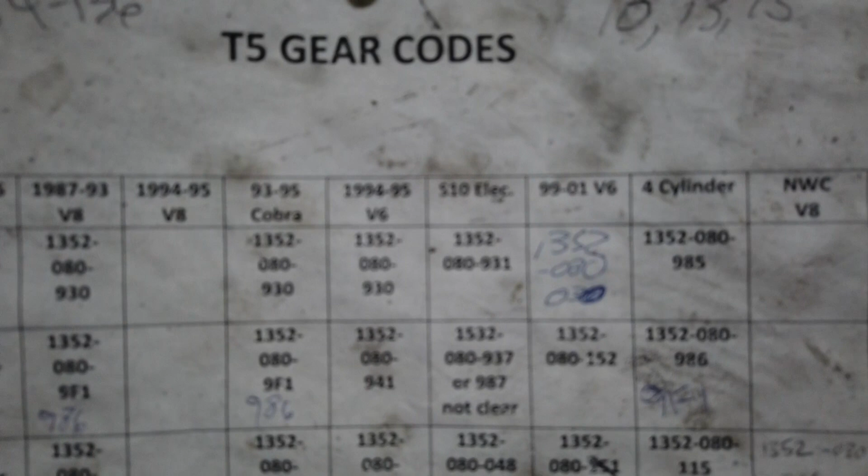This is actually something I want to share with you guys. So I have this chart here of the T5 gear codes. The way that it goes is you have the 87 and 93 and all that good stuff. I can't get the camera to focus right now, but if you want a copy of this, let me know, I can send that to you.

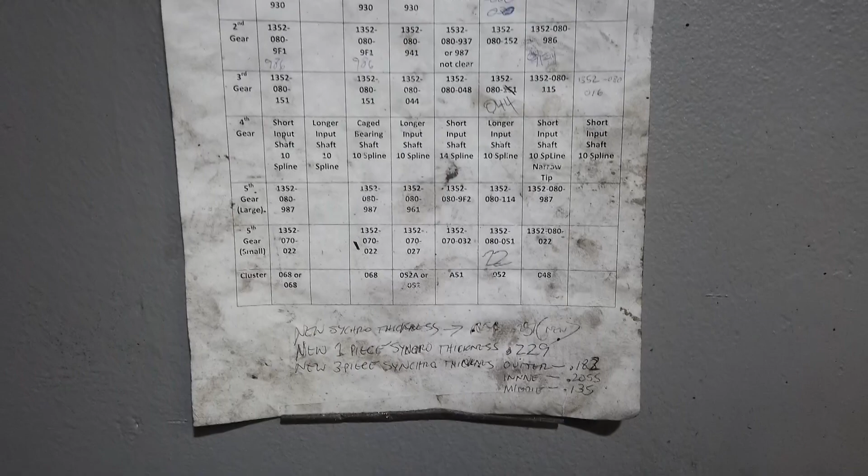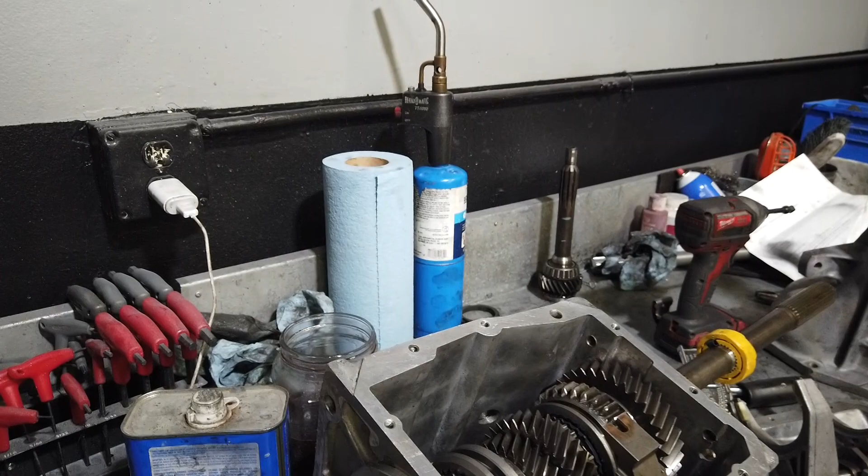And this is - I don't know if you can see it or not, but this is an 068 main shaft, if you can see. So the V8s come with a 068, and the V6s will come with a 052, and the 4-cylinders will come with a 048. Now some V6s with the 052 you could actually use in the V8s, and the strength of it is still the same.

This is just something that I discovered over the years. So if you ever see a V6 from 99 to 01 T5, grab it, because the gears in that T5 are just as strong as the V8, if not stronger. That was like the final days of the T5, and they improved a whole lot of stuff.

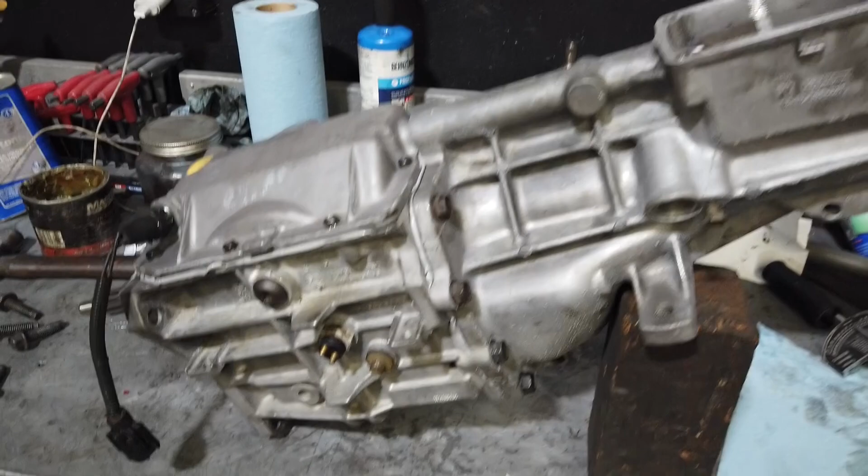Alright, so we're at the stage here, we got the T5 drying. This is a little tip I forgot to mention in my videos when I did the rebuilds - the reason I have it arced like this is when I put a little trans fluid on the bearings to lube them up so they don't start up dry, there's a little small puddle of trans fluid in the bottom. So if you lay it flat too early, the fluid comes and starts to eat away at the silicone before it gets to dry, and it'll never seal again. So to avoid leaks, take your time, leave it upright, and then do the front retainer shim later, or you could just do it like this.

So it's been about 2 days since I've been able to post, but it's because I've been 2 days busy. Anyway, yeah, we're back in the house, man. Airport, airplanes, and all. No ice cream trucks this time, but we're back in it.

So today we're gonna put in the transmission and start fooling with the wiring. Check this out.

So boom, there it is, the golden T5. Okay, going in, about the prettiest thing going in this car. I figured since I already had one cleaned up at the shop - this is a used unit, this is what a lot of times my used units look like. You know, I inspect the synchros and all that good stuff, and boom, here we are with this.

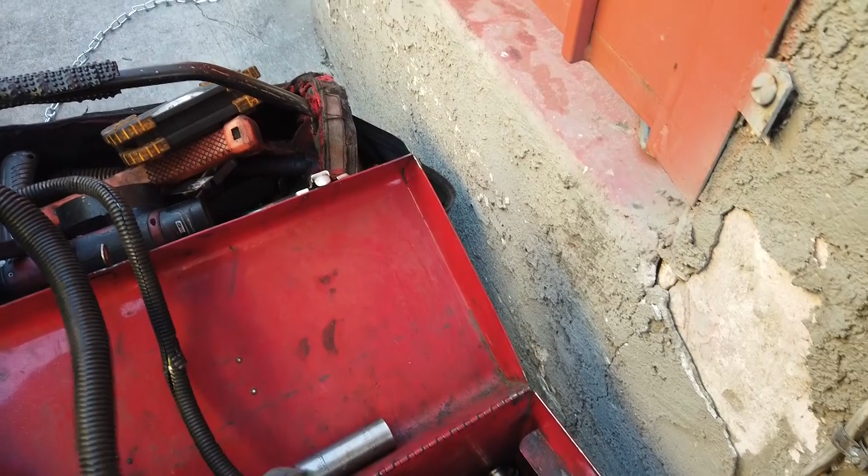Alright, okay, let's go. Finally got the 4-cylinder wiring harness out. I kind of wrecked it a little bit with the screwdriver trying to squeeze it out, but it's out. Now, one thing I had to cut off of this 4-cylinder harness was the distributor plug, because the V8 harness that I have does not have it - where is it? See, it was cut off. I don't know what happened. Maybe somebody else did what I just did in the junkyard.

So cut it off. The wires match, the wire colors match. I'm gonna check the wire schematic and make sure that they do the same things on both cars. It's got this insulation on here, so when I fuse them together, I'm going to go ahead and use this insulation wrap again because it's there for a reason. And yeah, so boom, that's my V8 wiring harness.

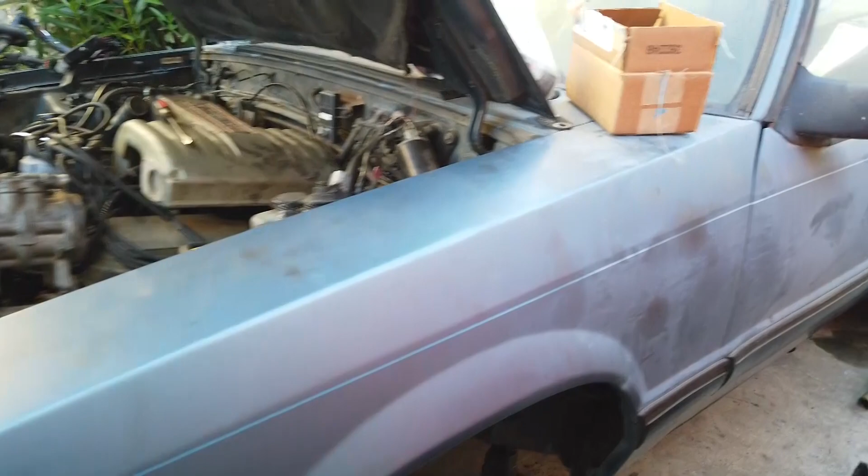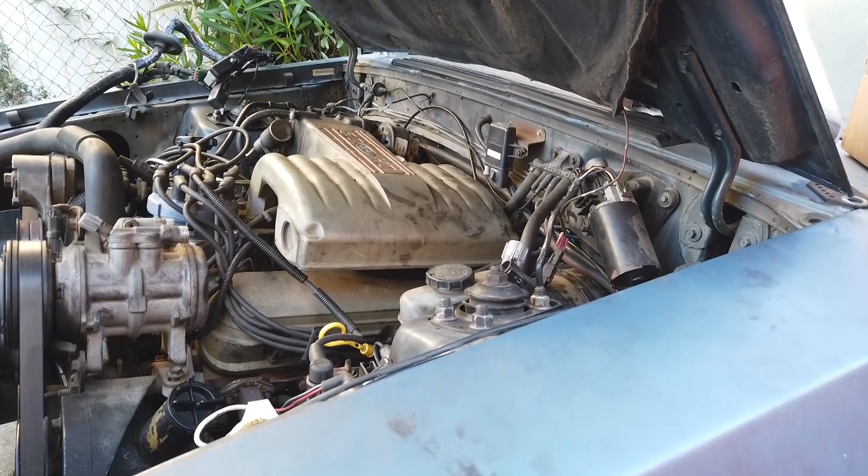That's going in today. But two things I forgot. Number one, I need washers for the bolts in the bell housing. And two, I need a transmount. I don't have a transmount here with me, so I'm gonna go ahead and go grab that and come right back.

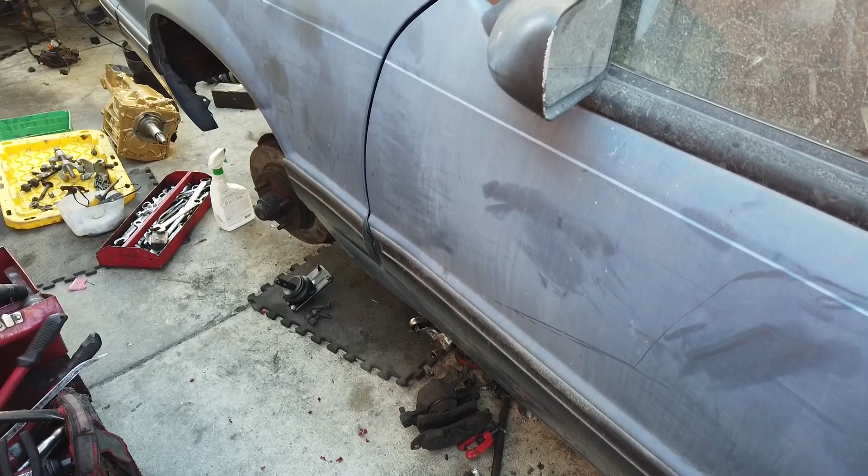So once again, we have reached a frustrating point. This is what I'm talking about when I say it takes a while to put together cars if you don't have all the components. I used to have an engine block plate, T5 block plate, sitting in my shop for about 2 years. I gave it to my homeboy for his car because I didn't think I'd be doing this swap for quite some time. And I got the bright idea to just use the automatic block plate.

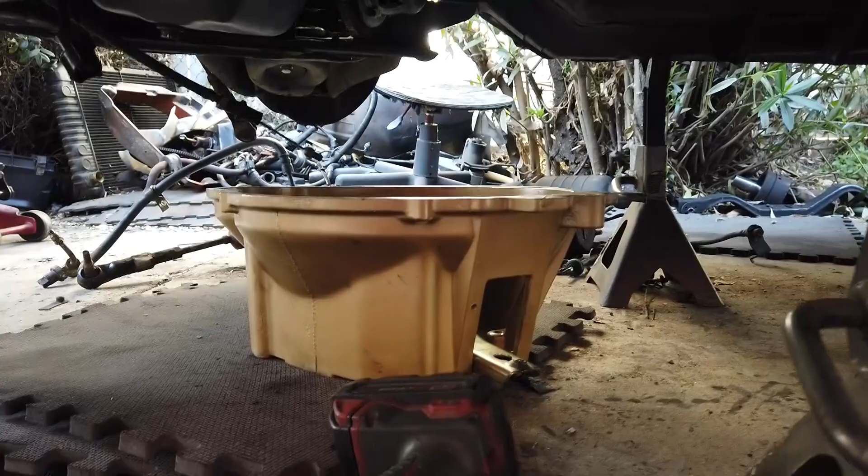Problem is that the starter locations don't line up with the bell housing. So that just means I gotta take the pressure plate back off and take the flywheel back off. Not a big deal, it'll take me a few minutes. I've already changed the rear main seal. That's just something good to do every time you do a clutch job, in my opinion. But yeah, super frustrating.

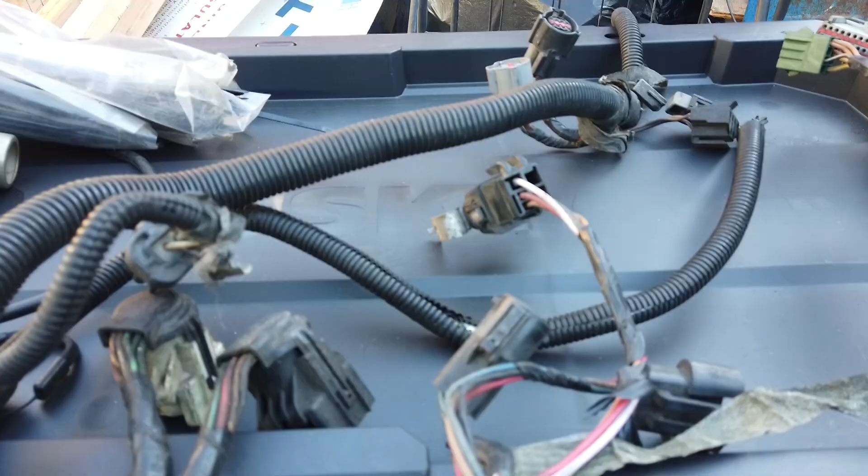So instead of dwelling on that being frustrating, let's just tinker with this wire and see if we can get it to do what we want it to do. Since we can't install the trans because of the block plate, we're gonna go ahead and move on to this wire. And this is low-key what I've been trying to avoid since I started this project.

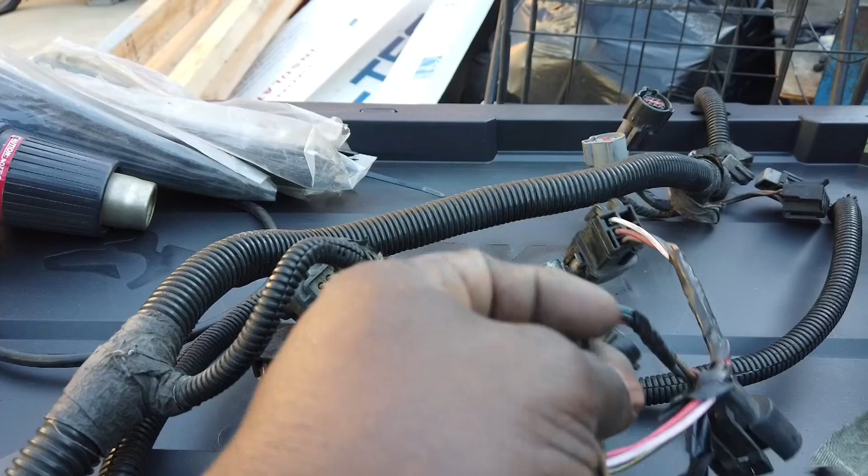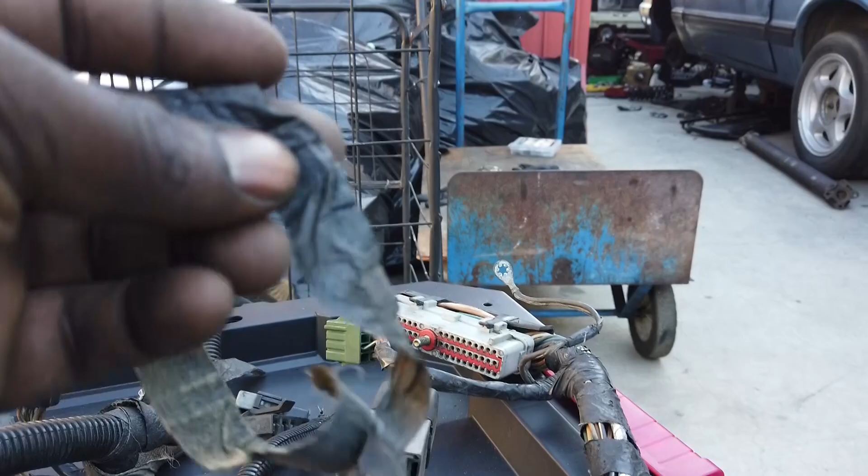Yeah, so there's a few things I'm gonna do. Number one is rewrap some of this electrical tape. This stuff has been on for 30 plus years, I could use a rewrap. I'm probably gonna go through a whole roll of electrical tape, but that's fine.

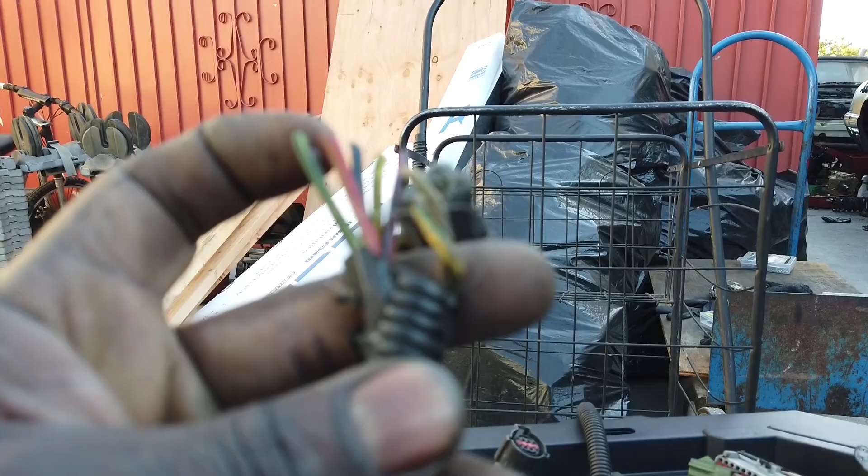Like I said earlier in another video, the only part of this wiring harness that is missing is the connection here for the distributor. And all I did was cut the one off of the 4-cylinder harness, which is this one right here. Other than that, I think that's it.

Also, I need to do some splicing too with the alternator wires, because alternator wires in this car are short since the alternator is not in the same location. So I gotta extend the wires for the alternator as well. That should be interesting, a little tidbit to put together.

So I downloaded this wiring schematic. Very basic. I actually like the way this one is done versus the one with all the lines and everything. This gives you the names of everything. So I'm just gonna go through it so we can understand what's what.

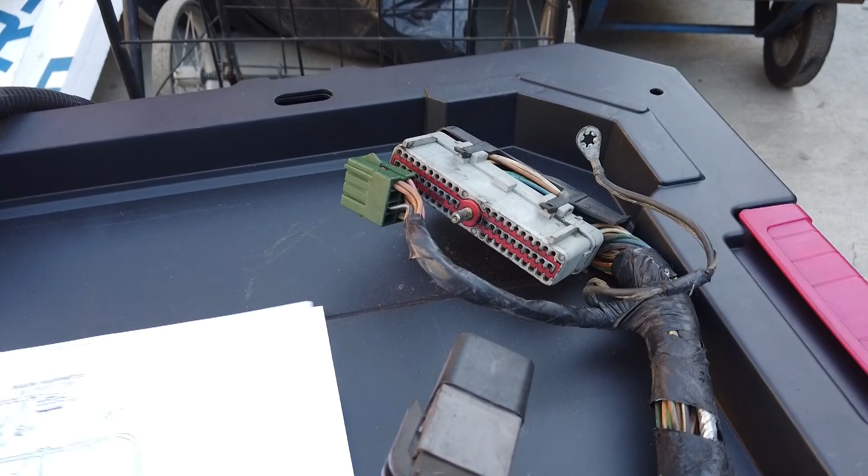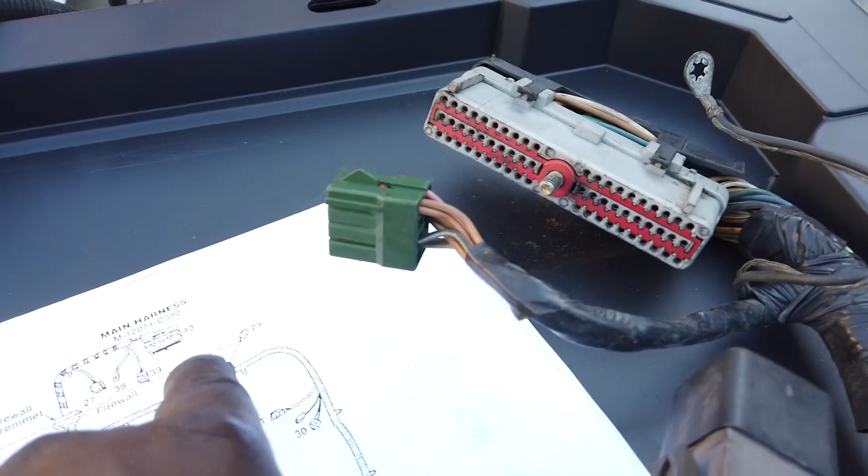So for me, this is pretty obvious. I know this is for the computer, and it's on this, it's number 42, 60 pin connector. So boom. Right when we come out of that, we got two, 38 and 39. See these two connections right here. So 38 is the body ground and 39 is the green 8-pin connector. So here's the green 8-pin connector and here's the body ground. All right, so we're moving up the snake here.

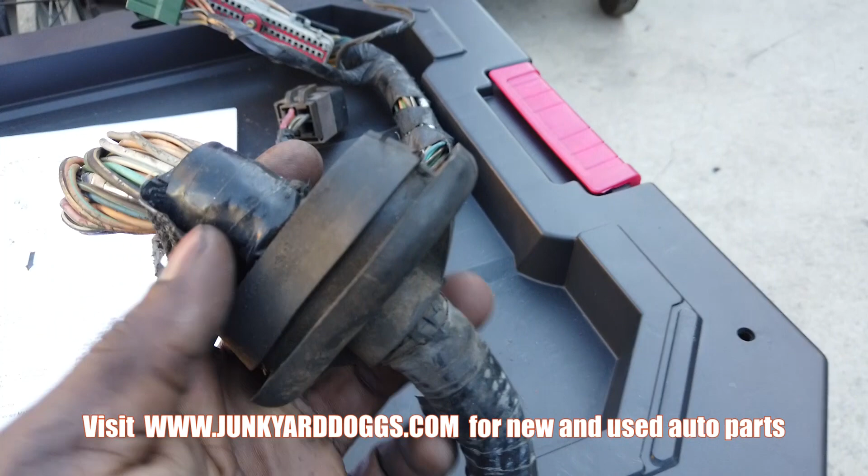When we get to this, what's that? So we move up the snake here to that. That's 27, that is an EEC power relay. Anyway, we'll move up the snake. Here's a rubber grommet that goes in the firewall. I'm gonna rewrap all this.

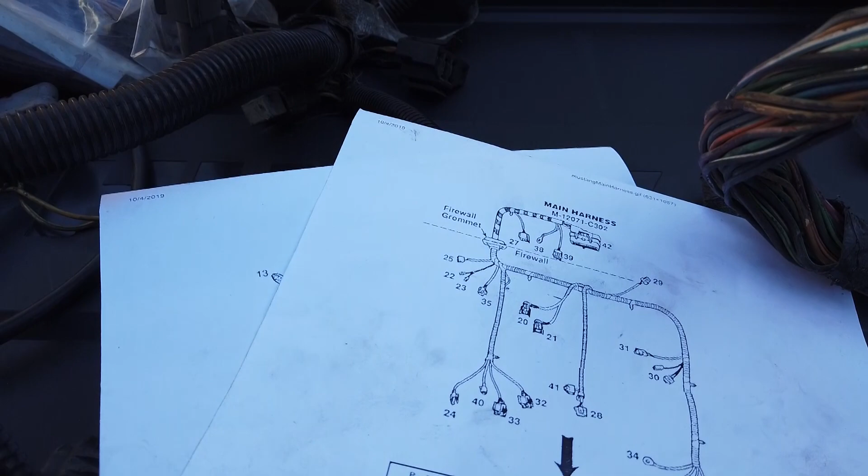Let's keep going. And we come to this group right here, all right? So as we follow that on this, we've got this group here. So you got one that has two, it's coming out, and then you got this one, and you got that one. So this one is 25, and that's the EGR vacuum solenoid.

And then this one, which has a broken wire, so I want to rewrap that a little bit. Anyway, that one is, this is 35. This is an AC pressure switch. Interesting, okay, I don't have AC in it yet.

And these two are 23, 24... Thermactor diverter solenoid and mass airflow. No, hold on, 23, 22. Thermactor air bypass solenoid and air diverter solenoid. So these go to something else in that corner there. Okay, let's keep going up the snake here.

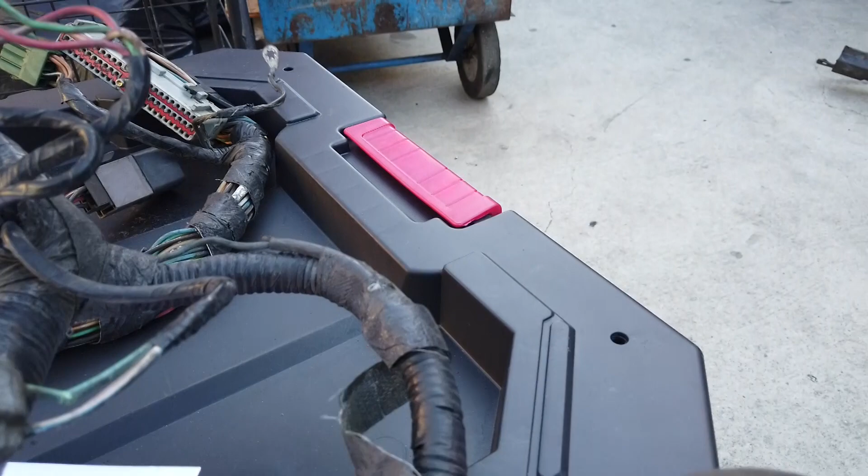And then we got, as we go down the snake here, we got this long branch off right here, right? Which I would imagine would be this right here. And it goes to this group. So we got like a relay, we got this 8-pin connector here, and then I know this is for mass air, I've seen this before.

24, mass airflow meter. So that would be this one, like I said. And then it's got a round one. That's 40.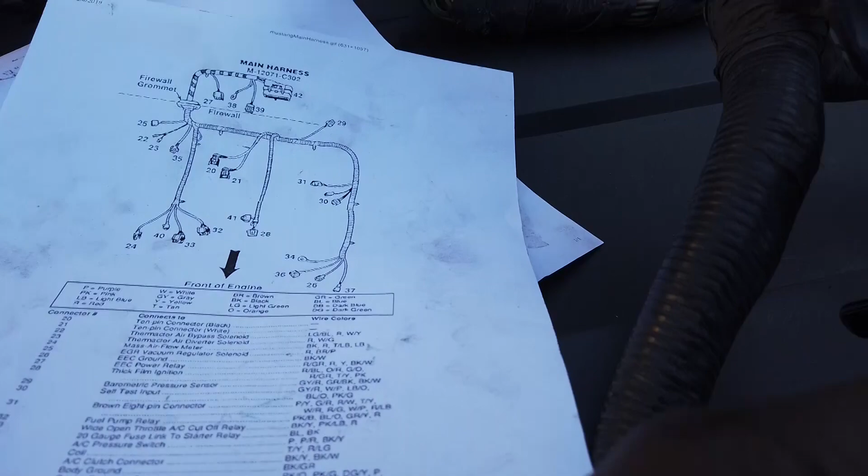HEGO sensor connector, main harness. So I'm thinking this is for O2 sensors, maybe. They go underneath the car.

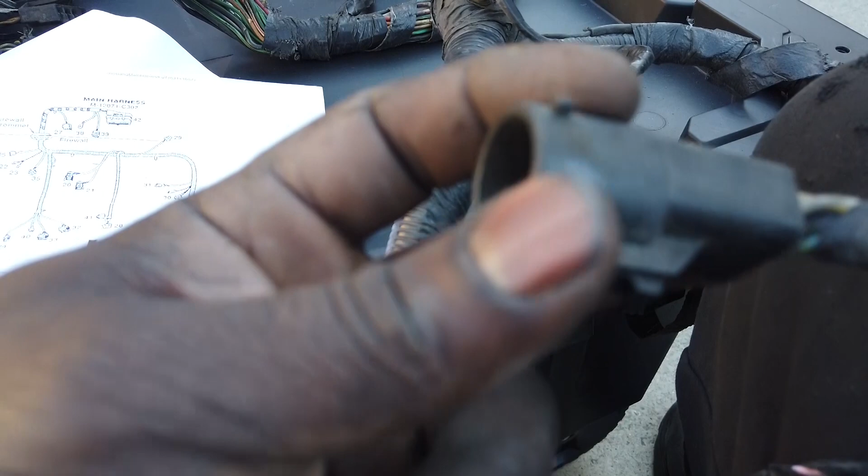And then there's this big chunky one, 33, cutoff relay, wide open throttle cutoff relay, or it could be 32, which is a fuel pump relay. I'm thinking it's a fuel pump relay.

Let me see, pink and brown. Oh no, pink and blue, black, gray and yellow and red, green, yellow, red. Oh wow, that's crazy, this is not matching at all. So I'm talking about that might have been yellow back in the day. I don't know, it looks like it could have been yellow. It looks orange now, it's hard to tell.

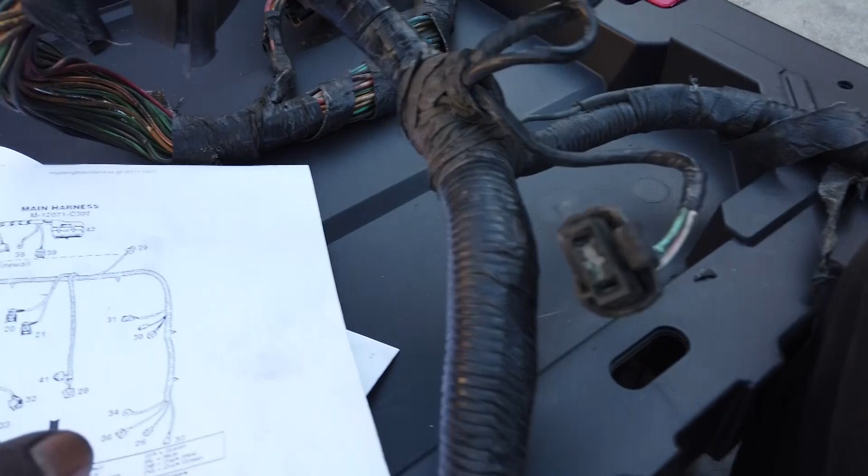That's what I mean, why this stuff kind of irritates me a little bit. Anyway, let's keep going down the line here. We got these two, so let's go down to...

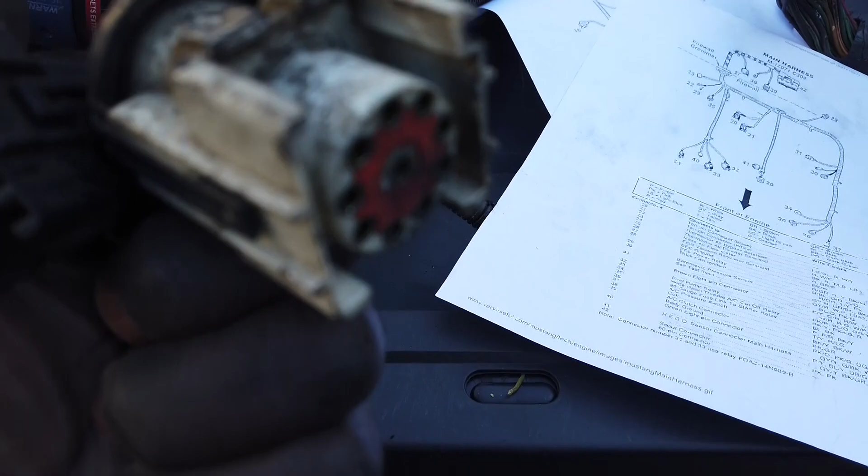Snake 2, and I've heard this joke told before, the salt and pepper shakers. These are dirty, jeez. If anybody has any suggestions on how to clean this without using water, let me know.

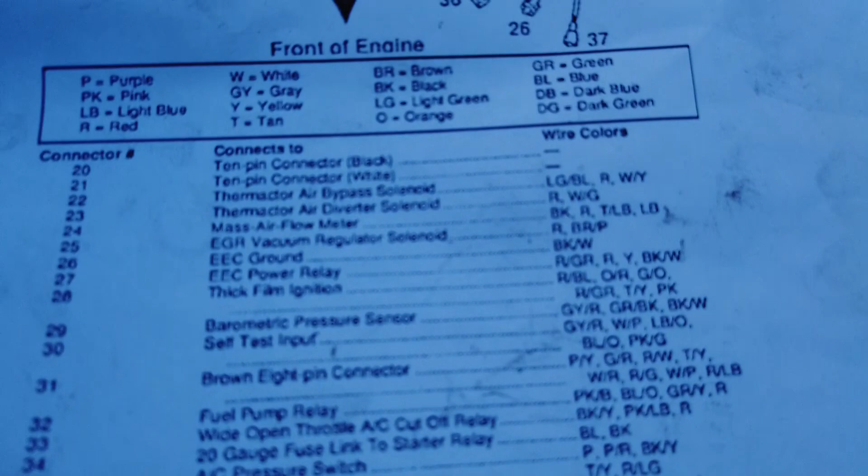Alright, so that would be 20, 21, 10-pin connector, white and black. Alright.

Moving on down the line, we got this long guy right here, which leads to what I know is a distributor, and it's not there. The distributor cable's out there, 28, thick film ignition, so yeah, it's not there. So we're gonna have to peel this apart and do some butt connectors and heat shrink.

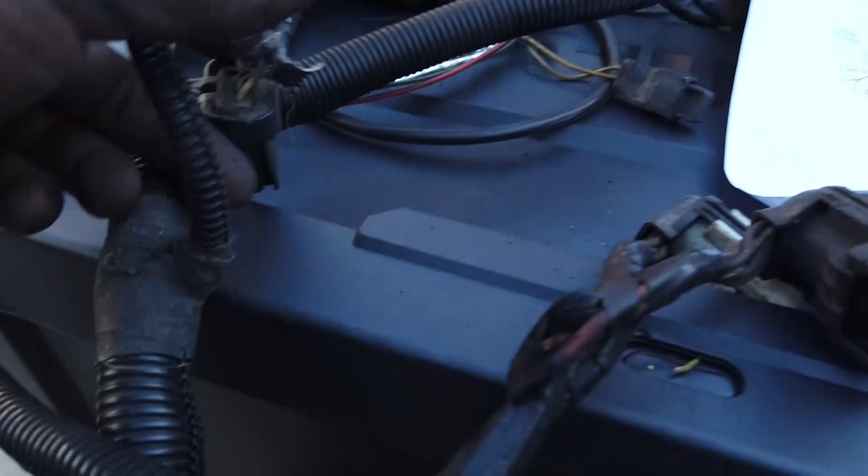Let's keep going up the line here, and we get to this. This is that guy right there. That's 29, barometric pressure sensor. Oh yeah, that's the one that's on the firewall. So I guess it plugs in under there.

And they keep going up the snake here. Let's keep going up. And then we meet this little group of guys here. So I guess this would be considered 31 and 30. Interesting, I know this is a self-test thing. This is not connected to anything.

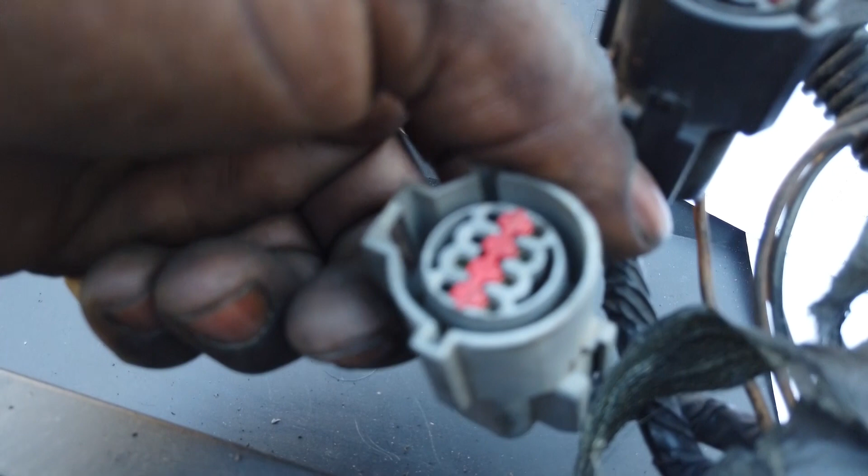But these 31, a brown 8-pin connector. See, I guess it's not the right vehicle, right year or something, this harness, but it gives me a general idea. There's supposed to be, this is an 8-pin connector and this is an 8-pin connector. This harness is from an 89, so I'm assuming that it's a little different depending on the year.

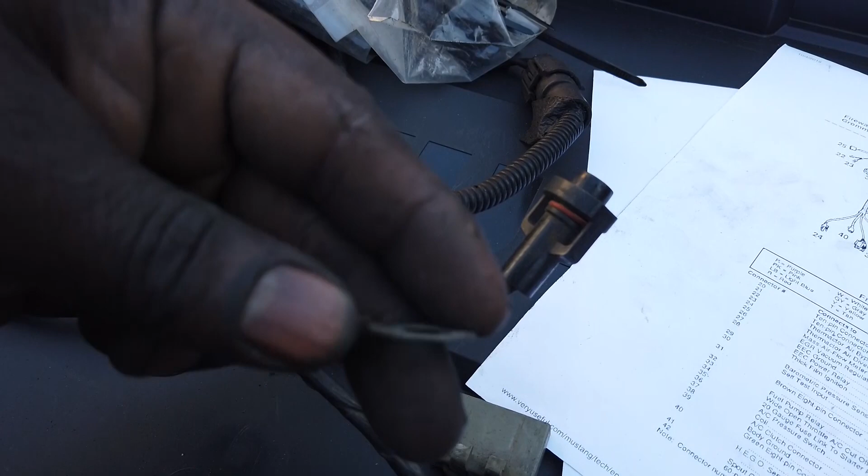So let's keep going. And then right here we have 4 connections, so this loop's 34, I'm assuming. It's 20 gauge fuse link to starter relay. Boom. And then I know this is a ground of some sort, so 26 EEC ground, you plug that in.

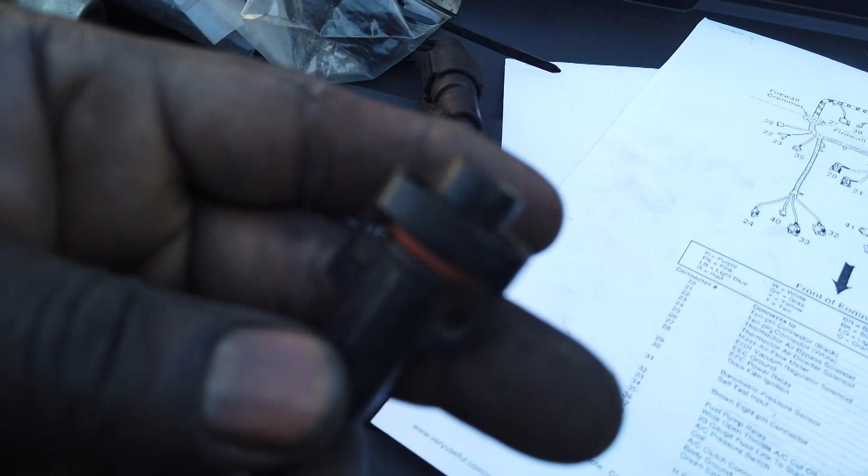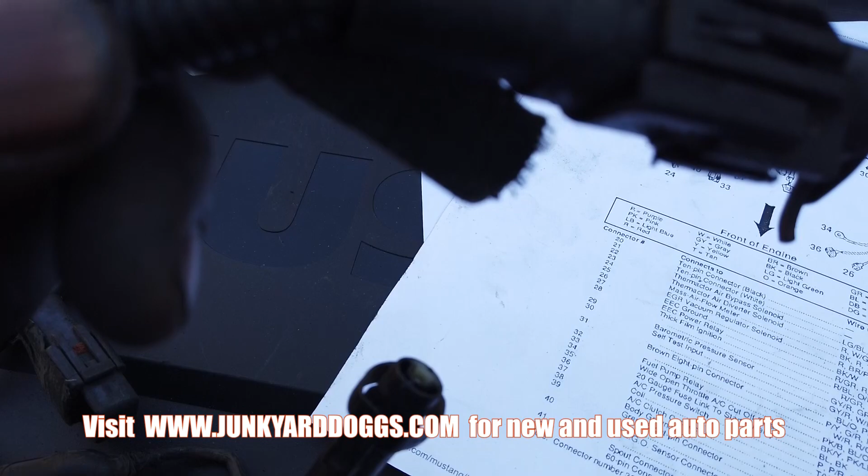This, I believe, goes to the coil. Let me see, 36, yep, it's coil. Now we got this boy right here, it's been plugged out, it's 37. AC clutch connector.

Okay, so that's it, that's everything that I could figure out to the best of my ability. So I'm gonna go ahead and start cleaning this up.

Let's go. Yo, check this out, I'm doing wiring, yo. I'm gonna take this thing, I got the heat shrink and everything. I watched a couple YouTube videos about it, but I'm actually doing wiring. Like, I'm actually doing this, man. This is tight, I never really did this before, so hopefully this goes well.

I'm just matching the colors right now. So yeah, let's come back in a minute when I get it done.

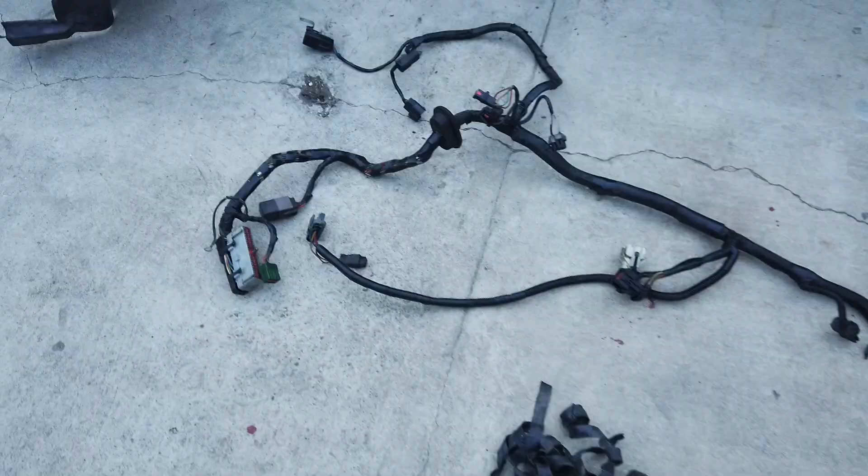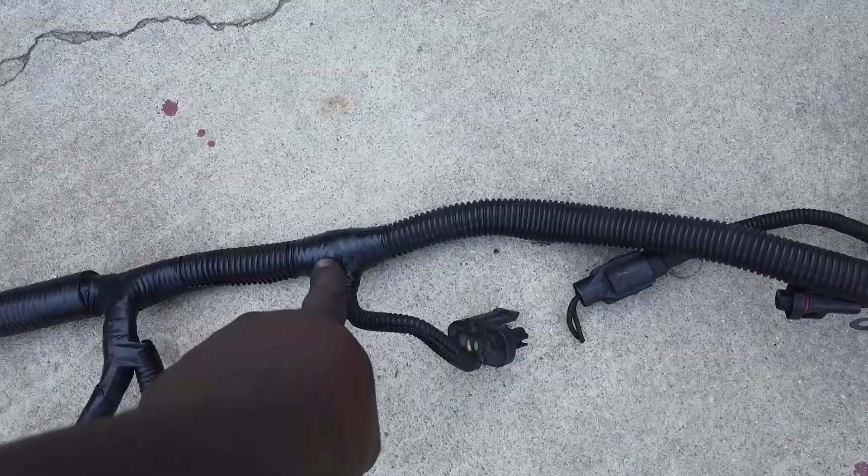So there's the harness cleaned up. So I rewrapped this area right here, I rewrapped this connection right here, rewrapped down there. I didn't do that part because I ran out of tape, but I rewrapped here. I did this, fused this in. I rewrapped there, I rewrapped here, and I rewrapped there. And that's the pile of old 30-year-old tape. Can't be that bad, it lasted this long, right?

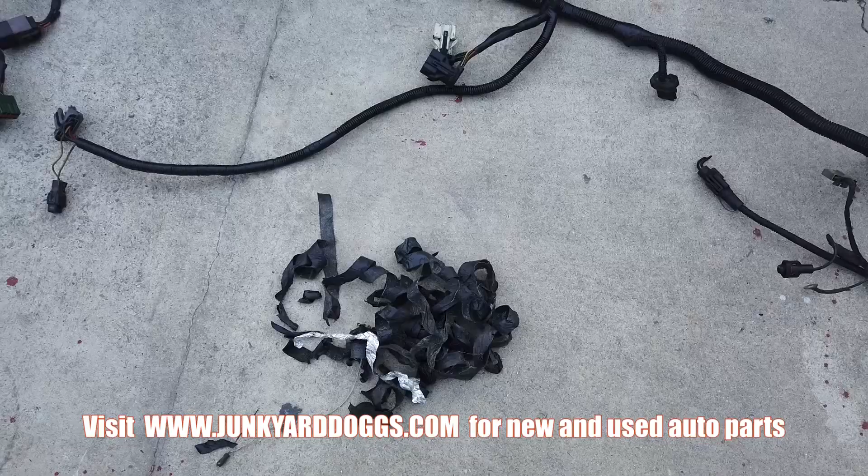All right, so let's go ahead and try to line this in now. All right, let's pick this thing up. Alrighty.

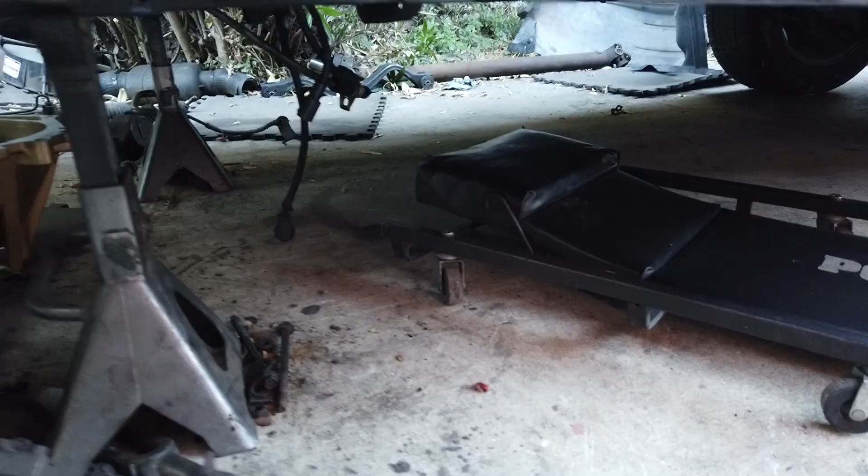Well, one guy said to put a little grease on the 60-pin connector so that it would make it a little bit slicker. But the problem with that is when I go to grab it, it's going to be hard to grab. So I'm going to try it my way first, and if it doesn't work, I'll try his way.

All right, let's see here. So I kind of made the mistake of putting the stuff in first. So what I'm going to do, I shouldn't have put this in until I finished doing that. I was just kind of having a day where I wasn't getting much done. So I'm going to take these, at least take this part out of the way.

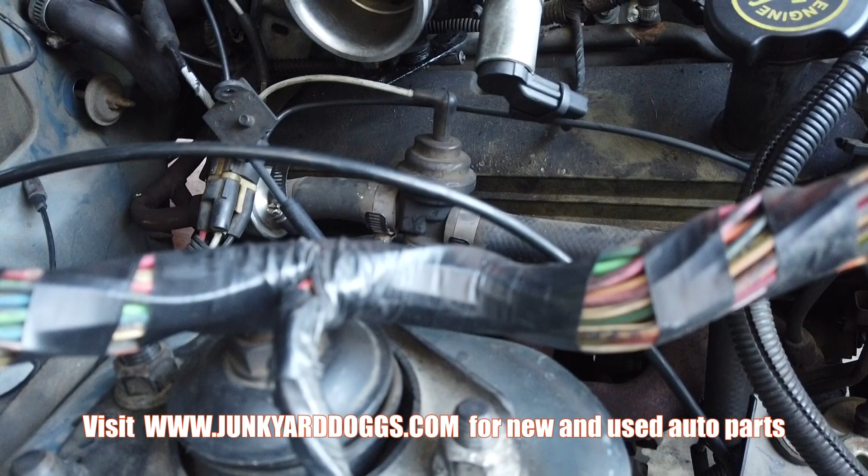I'm going to go look at my other Mustang to see if it comes over the line. I think it goes under like that, but we'll see.

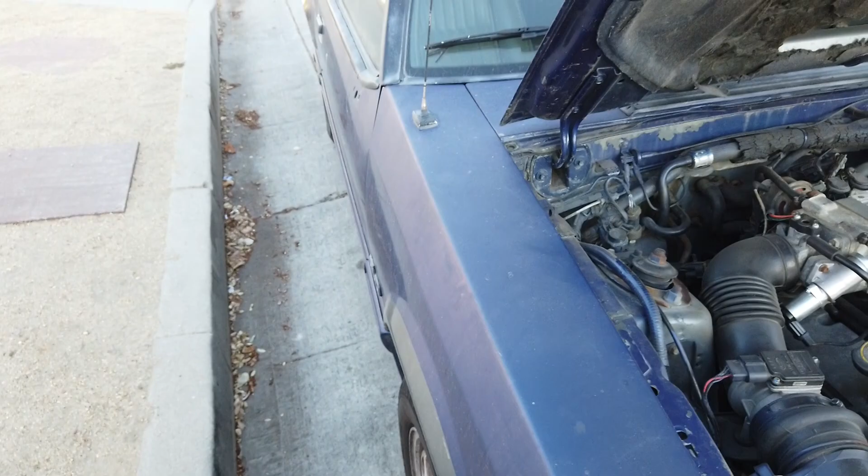All right, let's go. All right, so this is my vert, it's the beater, the F-it bucket, you know what I'm saying? So check it out, it goes underneath the line here. Yeah, so it goes underneath the line, runs across the firewall there, behind the sensor. I'm gonna leave this up while I do this. All right, let's go back over here.

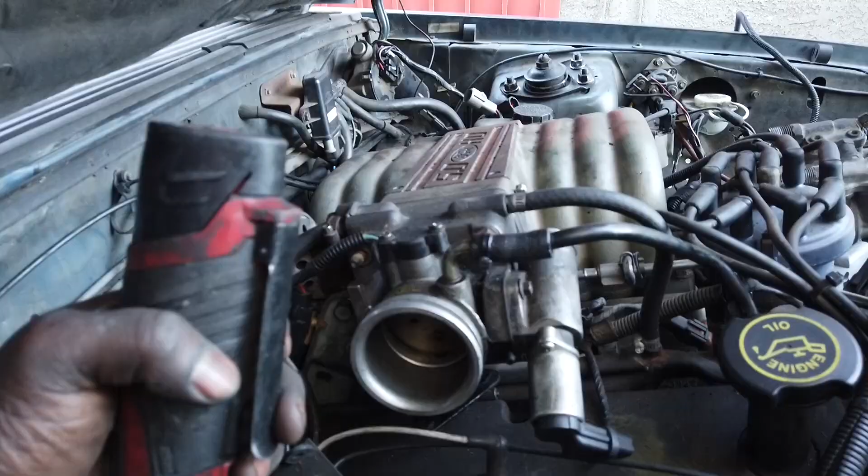So I'm gonna go ahead and remove that. I'll find it in a sec. There it is. Pull that out of the way. Oh, that's weird. Alright, so we're going to put him in there.

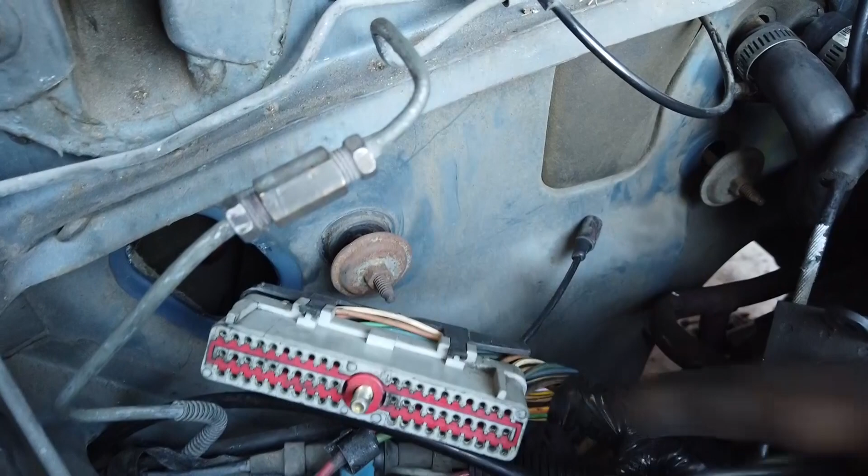Needless to say, I don't have somebody filming this, so I want to stop the camera and start to shove it down and pull it down myself. But I got to get inside the car and do a little bit of this so that I can start to make it back down in there.

So we got pulled through the firewall, and what I did to make that easier, which I didn't even think about until I didn't have any space, was to just take off the protective cap. Made it so much easier to go around corners, and I'll just put it back on right now.

You know? So boom, it's in there like somewhere, you know what I mean? You know what I mean? Alright, you know what I mean?

For sure. Alright, so from what I believe, the computer goes back up in this little spot. We screw it down. I lost one of the screws, so I'm gonna go ahead and take it off the other one. So one's a ground, one's to hold this down, and then you gotta screw this into the computer.

Boom, boom. Let me hear you say, well. Yeah, that's about it, man. Get that mug up in there, and we're good to go.

And this green goes to this, like that. This green plug goes to that. You know, now that I'm doing this, I can see how this was a lot easier than I had it in my mind to do. It's even going that way.

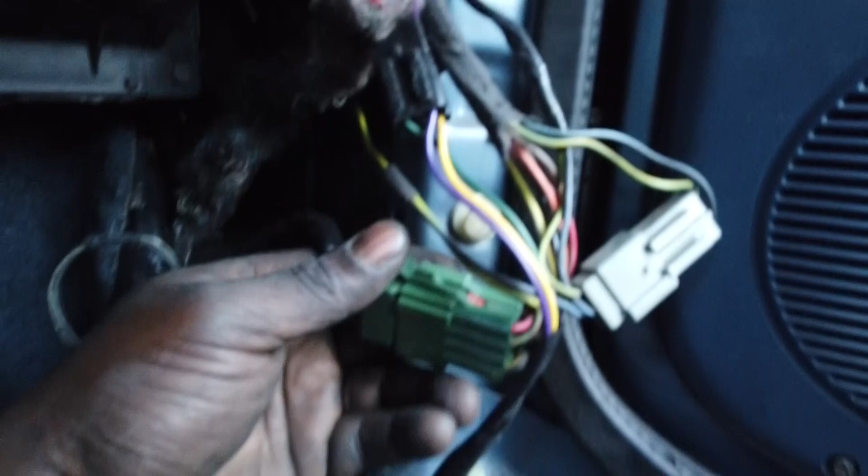The reason why I say that is Ford was smart enough to make everything only go in one way, and all the wires kind of hang out around the area where they're supposed to go. So what I mean is, as soon as it came out the firewall, all the connections for the smog stuff was pretty much right there. This is for the AC, like there's usually a little AC canister right here, so that's what this is for. Obviously I'm not hooking that up right now, but when I do want AC, I got access to it.

Alright, let me go ahead and hook this vacuum line back up. Took it loose. Boom.

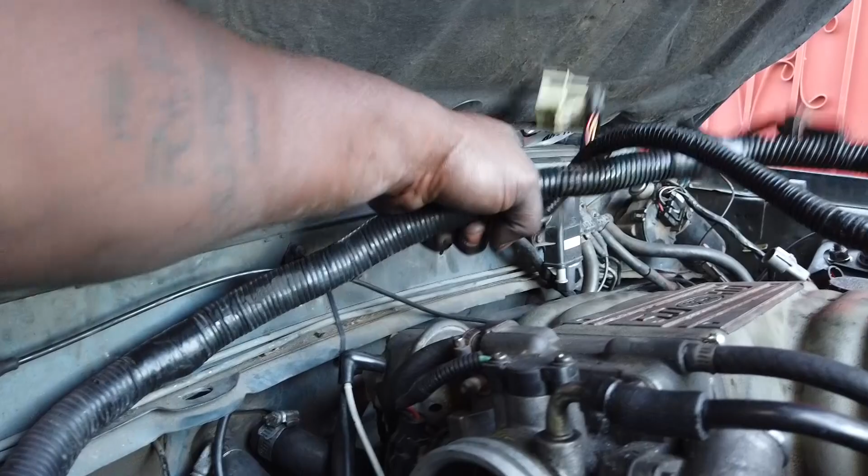So as we're going across the top here, we got the salt and pepper shakers right here. Alright, let's hook those back up. Okay, that's in. And let's get him back. Okay, and he's back in now.

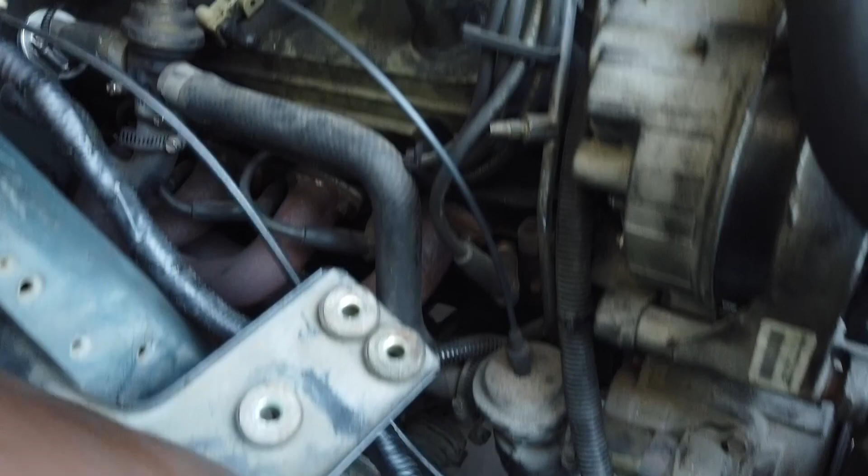Alright, so hook these guys back up. And then we got this stuff here. I'm gonna actually attach it to the firewall right here like that, have it go under. This is for the MAF, right? And this, like the other one, is actually just screwed in underneath here, just like that. Okay, and this is the one that goes to all the O2 sensors and stuff, just under here.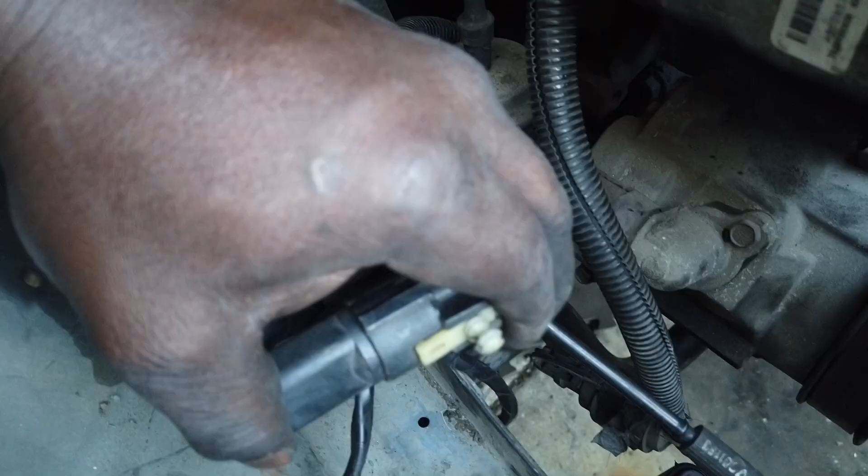So yeah, man, that's pretty dope. Actually, look, it's right here. Boom. So they hook up, they go together, and then it goes down to the O2 sensors. It's to show you that you have nothing to fear but fear itself, because as I'm doing this, I'm realizing that I was just tripping, man.

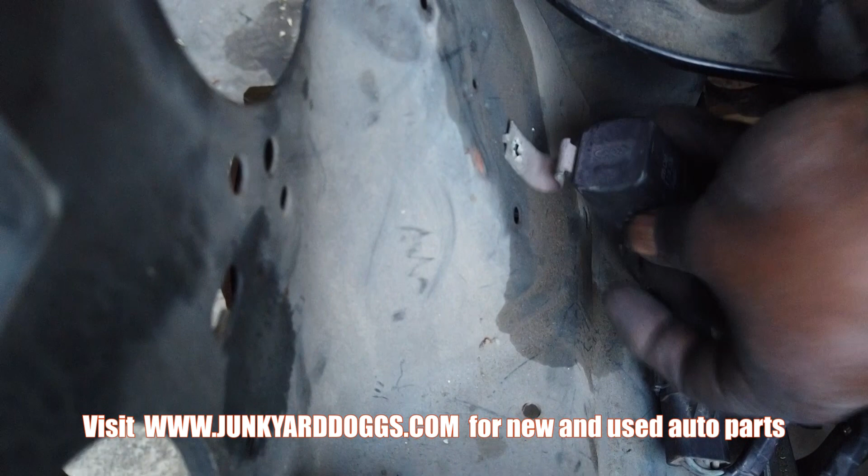This is not as hard as it sounds. I guess when you hear electrical, I'm thinking that it's like something crazy or whatever. See, and that goes there, got the little screw that holds it down, you know, and then the MAF comes up here, and that's everything hooked up right there.

So let's go around to the other side here. Okay. So this is the barometric pressure.

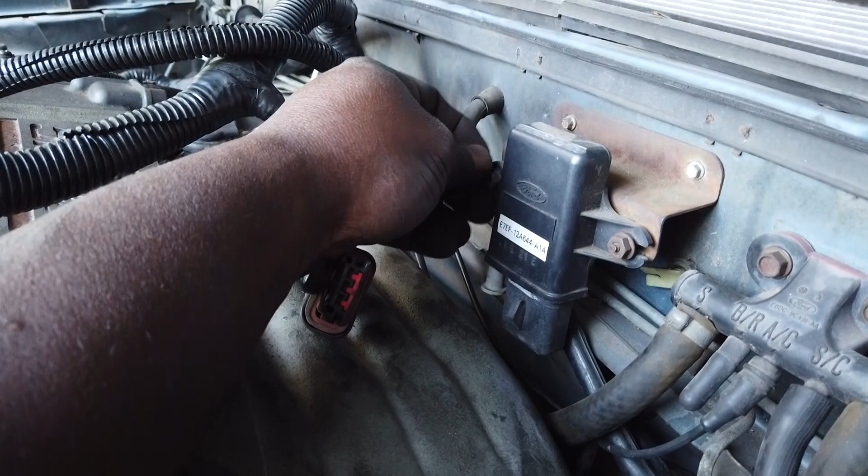Oh, look at termite. Oh, that's not good. It's not good at all. Get out of here, son.

Okay, so let me take this off for now, because the line actually runs underneath it, which is pretty dope. So hold on a sec here.

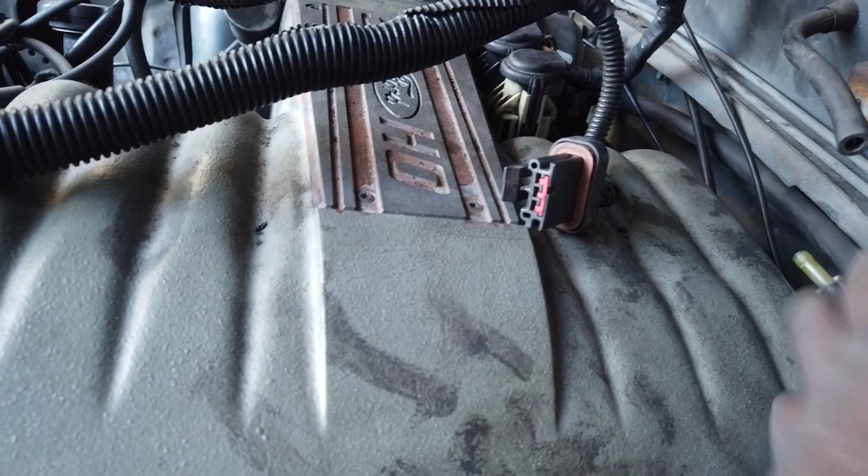So I'm gonna move this out of the way. I should have taken this out of the way too, because it all goes underneath all of this. So yeah, it kind of lays like this. And then we have this, it goes to the distributor. So that goes up and under here, and it kind of peeks out over on this side. So that's why it has to be so long.

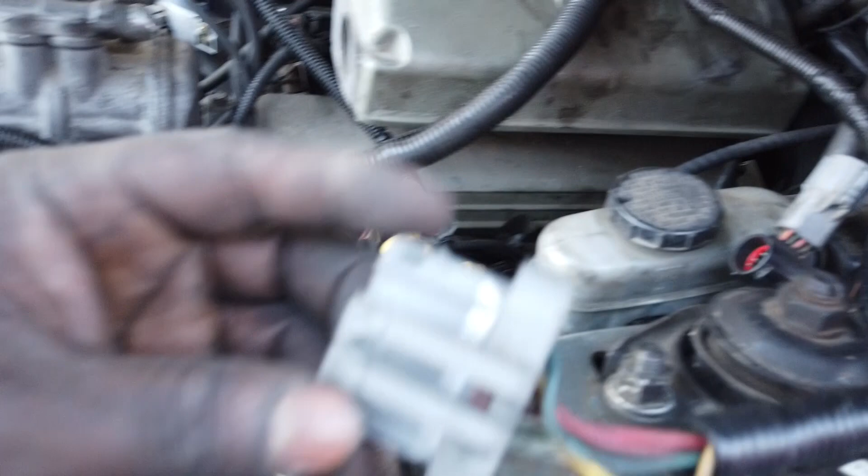So I'm gonna go ahead and put that. So this long wire with this looking plug here goes to the distributor. Okay, so I'm hoping we can get under here like this.

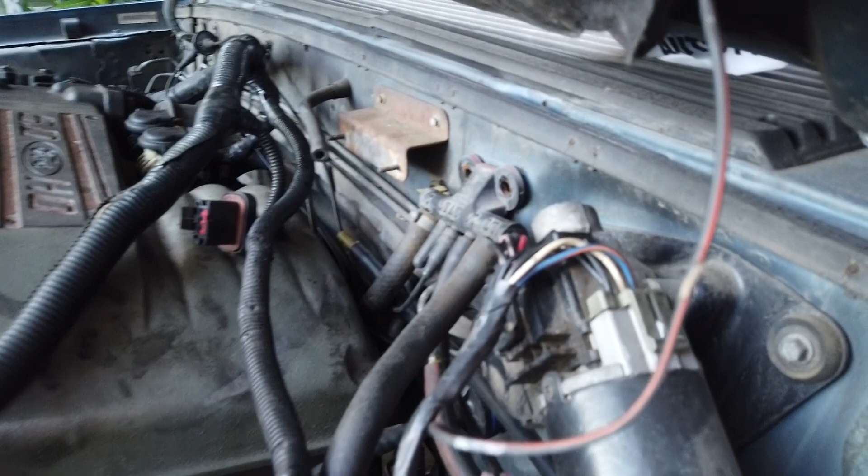See? That's why this needs to be loose. Let me take it off right now. Alright, so boom. Okay, and we just kind of move this forward and then just plop everything behind it.

So I know that this hose right here, I would prefer to not be in the way right now. We got this puppy right here. So I'm gonna stick him behind this. And like I said, this is...

The distributor, this goes into the barometric pressure switch or whatever. You stick it in there, and then we'll keep running it around. I'll show you guys that in a sec.

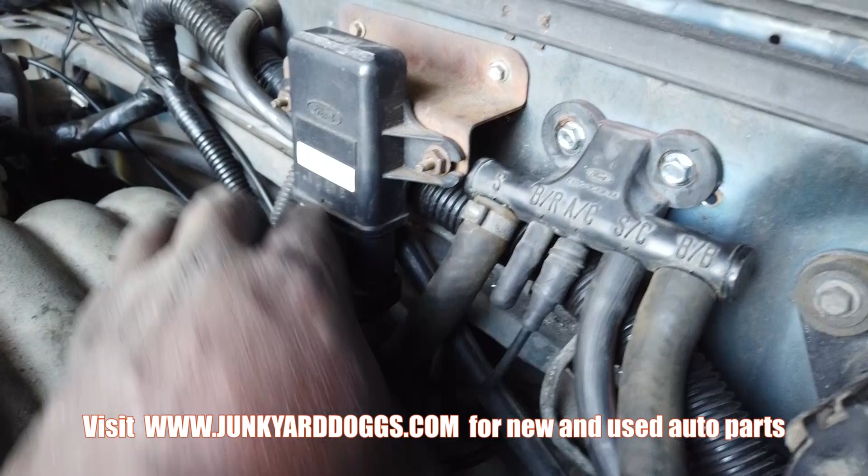I hooked up the little barometric pressure gauge here, and then I ran it under the side to take the stuff back off. I ran the Dizzy hookup all the way through, and then hooked it up right there. Boom, see? That was the one that was missing.

Alright, so now we're over here. It looks pretty straightforward, I hope I'm right about this. It's gray and gray, plug that in. Okay, black on black on black. Okay, so they're in.

This is like a little test thing. This, I don't know what this is for. I'm gonna find out in a sec. But I don't see anything for it.

It's weird, it almost looks like it would go to this. But I'll find out in a sec what it's for. Alright, let's just keep going down here.

Here we got this cable. So I'm guessing this stuff shouldn't be all up front like this. So I'm gonna use the cables from the windshield wipers to hold this down. Pop, hold it down. Alright, there we go. Alright, looks a lot neater.

So it looks like it had like this thing here. I might use some electrical tape to hold this to that, and then maybe hold that to there. And then this has it to where the coil plug, it's broke, but it still goes in. And then this wire here...

And then we have this black EEC ground right here, which goes to the 87 black ground, battery ground here. So here's the battery ground. And then there's this plug right here. So I'm guessing, yep, go together. That's the plug right there.

And then the AC switch is right there. Even though we don't have AC, the pump is still attached, you know. Yeah, boom, boom. And then I think that's it as far as the engine bay.

And I disconnected this because I thought I was going to do something with the alternator, because the alternator wiring, as you can see here, has to go all the way across, and it doesn't - I mean it reaches technically, but it's just a tad too short, just a tad short, but it's not a big deal.

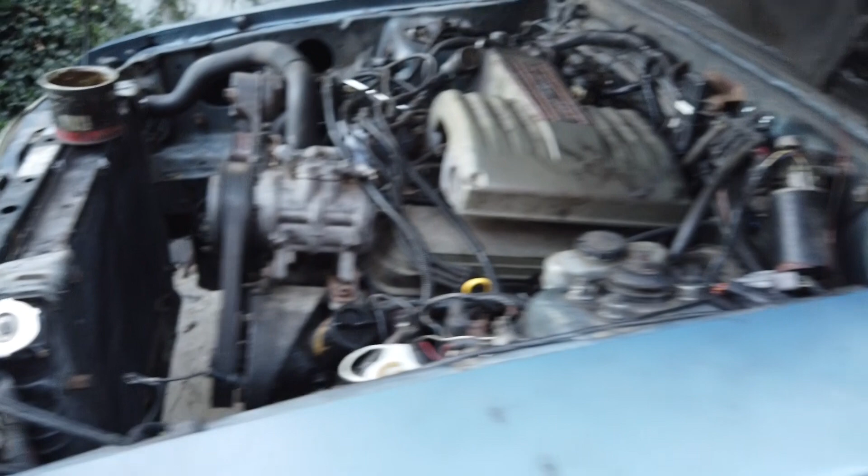Wow, that was crazy, man. That was a lot easier than I thought it was going to be, straight up. Now I'm just waiting for a block plate, man. Better get the block plate, put all that transmission stuff in, put in the drive shaft and all that.

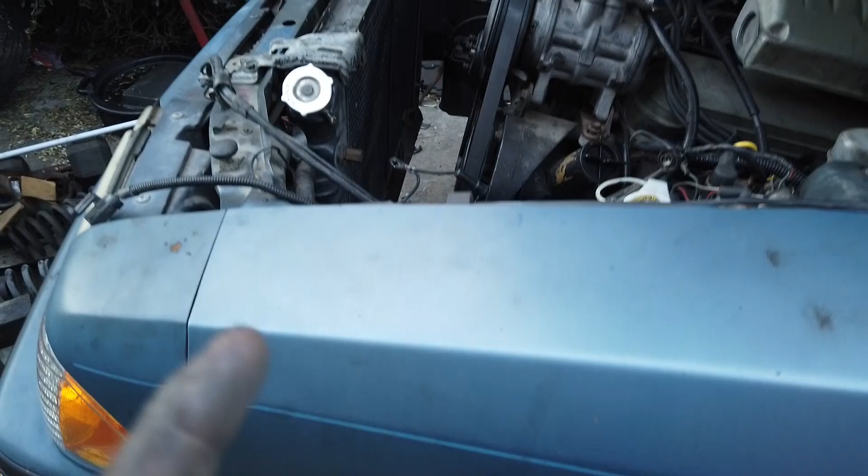I should put in the clutch fan and the shroud, even though I'm going to change to an electric fan. I'll put it in anyways, clutch fan and the shroud. But low-key, I think we might be ready to fire it up. Like, I think maybe Tuesday.

This is good news, man. This is really good news, because I was getting real frustrated. So yeah, man, that's pretty much it, man, what I'm gonna do today.

I went to a website called veryuseful.com that had all these wiring diagrams on it, which was really dope, which helped me gain the confidence I needed to accomplish this, because like I said, I'm a transmission guy, I'm a motor guy. When it comes to wiring, I kind of bug out a little bit, but not so much anymore. So a lesson I learned from this, man, is don't be afraid to try stuff. If you fail, I mean what else is gonna happen, other than you having to do it again?

All I'm hoping is that I make sure I remember to get all the grounds in, because all the grounds are really important to make sure everything works right. And other than that, we in there, alright? It was a good day. Junkyard dogging, woo!